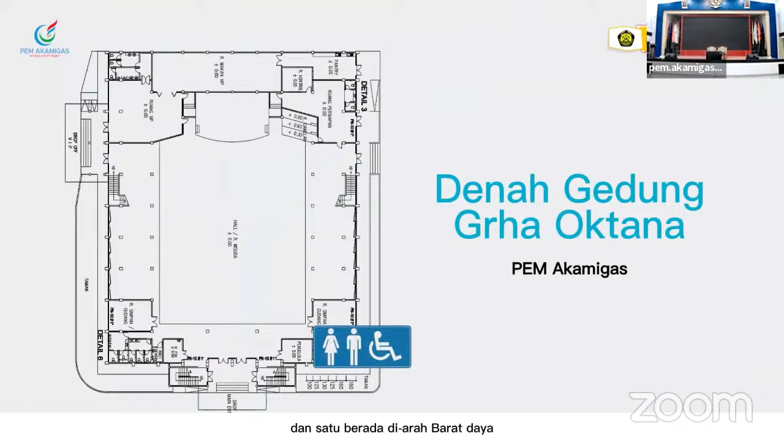Guna menunjang proses evakuasi gawat darurat, gedung ini dilengkapi dengan akses pintu darurat. Lantai 1 terdapat 3 pintu darurat, 1 di sebelah selatan yang merupakan pintu masuk utama, 1 di sebelah barat, dan 1 di sebelah timur. Lantai 2 terdapat 4 akses tangga darurat, 2 di arah selatan, 1 di arah barat, dan 1 di arah timur.

Untuk menanggulangi bahaya kebakaran, gedung ini dilengkapi dengan 9 buah alat pemadam api ringan. Terdapat 6 buah di lantai 1, 3 buah di sayap kanan, dan 3 buah di sayap kiri. Untuk lantai 2, terdapat 3 buah alat pemadam api ringan, 1 di arah selatan, 1 di arah barat, dan 1 di arah timur.

Saat ini tidak ada simulasi kondisi gawat darurat. Sehingga, jika ada alarm berbunyi, itu merupakan kejadian yang sebenarnya. Berjalanlah dengan cepat, tetapi tidak berlari. Jangan panik dan ikuti instruksi dari petugas.

Petugas akan mengarahkan Anda untuk berkumpul di muster point terdekat yang berada di sisi selatan atau sisi barat Gedung Grha Oktana PEM Akamigas. Demikian safety induction Gedung Grha Oktana PEM Akamigas. Kami berharap Anda tetap tenang jika terjadi keadaan darurat. Terima kasih.

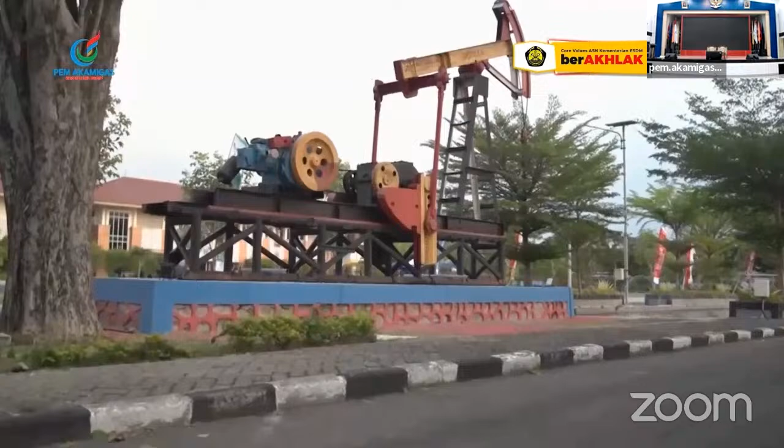Politeknik Energi dan Mineral Akamigas telah berdiri sejak tahun 1966 dengan nama Akademi Minyak dan Gas Bumi atau AMGB. PEM Akamigas merupakan perguruan tinggi di bawah Badan Pengembangan Sumber Daya Manusia, Energi, dan Sumber Daya Mineral, Kementerian Energi dan Sumber Daya Mineral yang bertugas menyelenggarakan pendidikan vokasi, penelitian, dan pengabdian kepada masyarakat di bidang energi dan sumber daya mineral.

Ribuan lulusan PEM Akamigas telah banyak berkiprah di industri migas di berbagai belahan dunia. Keberterimaan industri migas terhadap alumni PEM Akamigas sudah tidak diragukan lagi. Menjadi juara di berbagai kompetisi juga merupakan nilai tambah akan keunggulan mahasiswa PEM Akamigas.

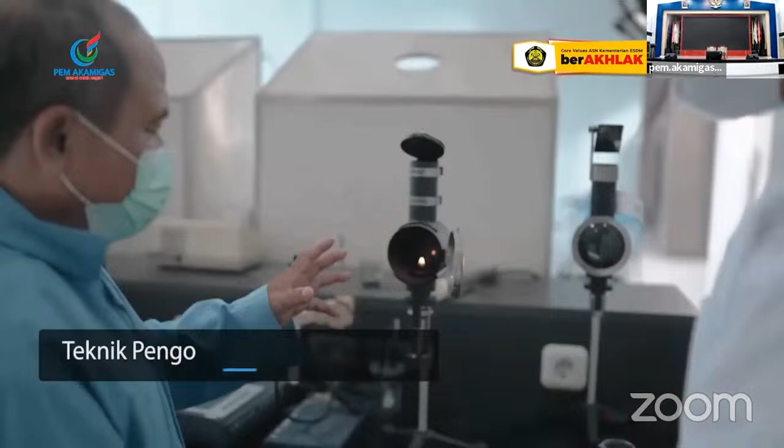teknik pengolahan minyak dan gas, teknik instrumentasi kilang, teknik mesin kilang, dan logistik minyak dan gas.

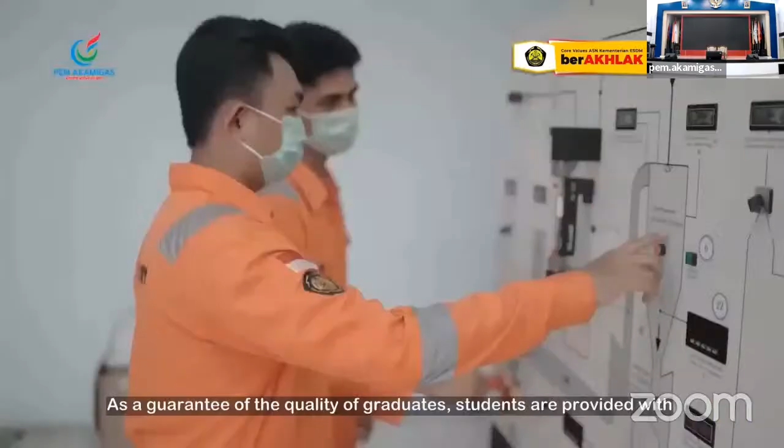Sebagai jaminan atas kualitas lulusan, mahasiswa PEM Akamigas juga dibekali dengan sertifikasi kompetensi K3 Migas untuk seluruh program studi, sertifikasi kompetensi yang sesuai dengan keilmuan masing-masing program studi, dan sertifikat lolos uji kemampuan berbahasa Inggris atau TOEFL, serta pembentukan karakter atau kesamaptaan.

PEM Akamigas hingga saat ini menerapkan sistem pendidikan berasrama. Oleh karena itu, PEM Akamigas telah menyediakan sarana laboratorium dan bengkel yang lengkap, ruang kelas yang memadai, perpustakaan yang sudah dilengkapi dan dikembangkan ke dalam sistem informasi digital library atau perpustakaan online, Graha Oktana, asrama, restoran, sarana kesehatan atau poliklinik, sarana olahraga, sarana ibadah, dan juga sarana rekreasi.

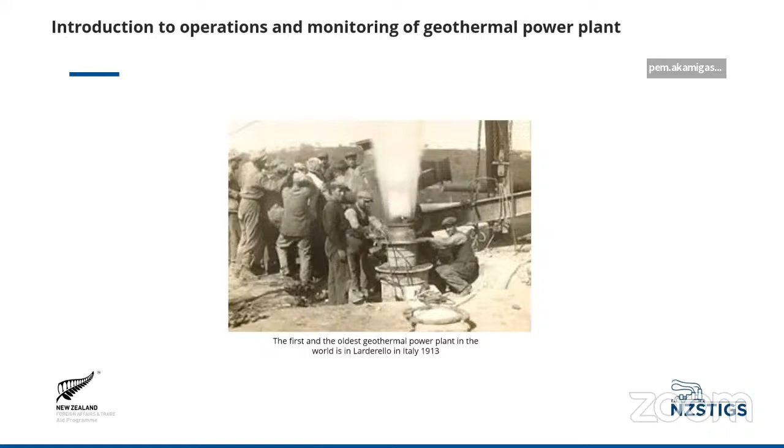There's the very first geothermal generator. There's your first plant, Larderello, Italy, 1913. That's New Zealand's, in 1958. That's what it looks like today.

If you just click on that picture, one in the middle, just click on the one in the middle. Gone a bit too far. Never mind, okay, so let's step back.

So 1958, New Zealand built the first one. And what year did Kamojang get built in Indonesia? 1960? 61? Built by the New Zealand government and a deal with the Indonesian government. So that's when your first geothermal power, still running today, okay.

But what we want to look at is what does currently run. So if we just open up that YouTube clip here.

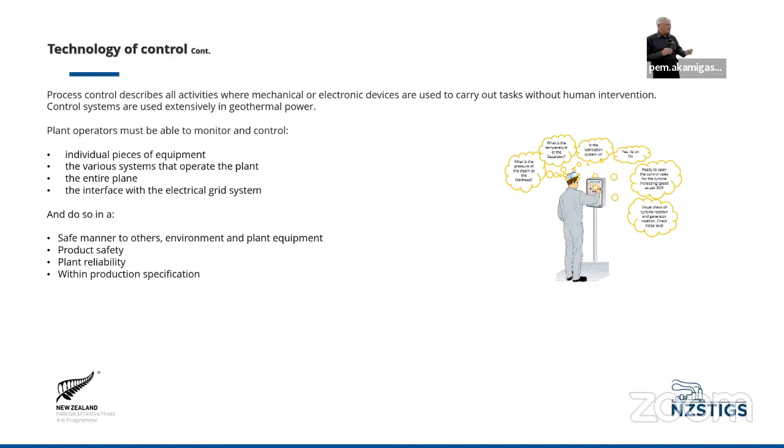You've got to know what the control valve is doing on the steam field. You've got to know what the steam field's doing because it's got traps in it to make sure the steam is still pure. You've got to know what the separator's doing, what the turbine's doing, what the generator's doing, what the power is doing as it gets transferred out to the grid, which is called PLN in Indonesia. And then you've got to understand what the reinjection system's doing. So that's what we're talking about.

Do you need a pointer? Oh, the pointer and... so what do I do here? That just moves the PowerPoint on, does it? The pointer is this one, and if you want to go to the next slide... oh, okay. Thank you, perfect, thank you. Okay.

All right, so here's what we talk about. I know it's hard for you to see. Okay, let's talk about process control. Who's heard of that word, process control? If you're in oil and gas, it's critical. You may not have studied it yet.

Process control enables you to control something from a computer. Typically, that's the pointer... oh, there it is, you're not going to show. That's all right. Typically, you as the operator would do it. Nowadays, we do it a different way.

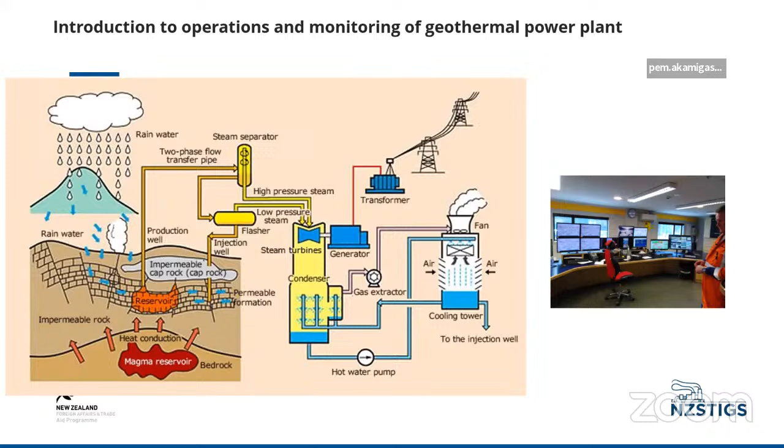Oh, there we are, all right. So, a bit of a complicated slide, but this is how it works. Okay, there's your control room where you sit. There's your plant. All of this is what you in the control room are starting to operate. I liken it to a car.

Who drives a car? Anyone? Who drives a motorbike? Anyone? I know you all do. Okay, last time I was here, a whole lot of people at the end of the day hopped on their motorbikes and drove out to where they live. Okay, so I know you do. Okay, now, my question to you.

Who turns the wheel of the motorbike or the car? Who turns the wheel, or do you go straight into the wall? The driver does, doesn't he? The guy that sits on the front. So who's controlling the motorbike or the car? The operator. Not the driver, the operator, in terms of what we're talking about. And they're the people who you put your trust in to operate. Is that right? And if you have a crash, you just tell the operator you don't want to drive with them ever again. Okay, but you're the operator.

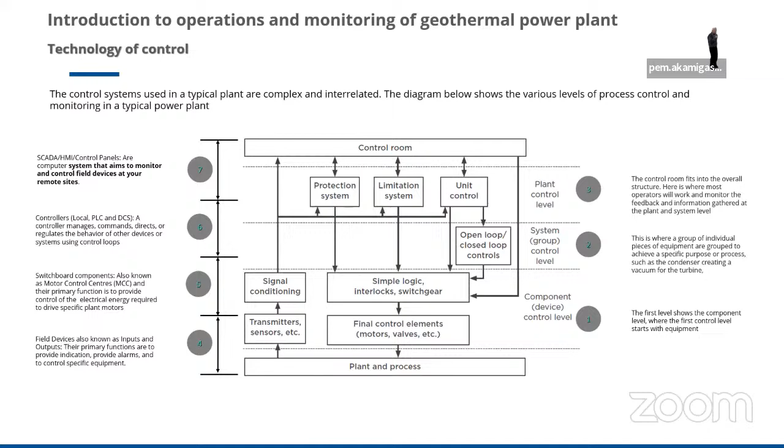And I don't know this will go. That's right, we'll skip that one.

All right, so here's you as the operator here, and you've got to look at a whole lot of stuff that's happening in here. Is that right? And you are approximately 5 kilometers away from here, where your steam field bore is. What do you do? Do you hop in a vehicle and drive all the way down there, check the reading, write it down, hop in the vehicle, drive all the way back and make the change? Or in today's world, do we put a sensor there that tells us what the pressure is, that tells us what the flow is, which comes up on our screen back in the control room, enabling us to control. That's what it's doing in terms of that process there.

Okay, so that's what we're doing here. Here's all the thoughts that we have to do. What is the pressure at the steam, at the wellhead? What is the temperature in the separator? All right, we have to think like that. Is the lubrication system turned on? The lubrication system enables a turbine to rotate. If there's no lubrication on the bearing, a catastrophic failure will occur. What that means is a tremendous explosion on the steam turbine - just like a crash in your car or your motorbike, if that's not working.

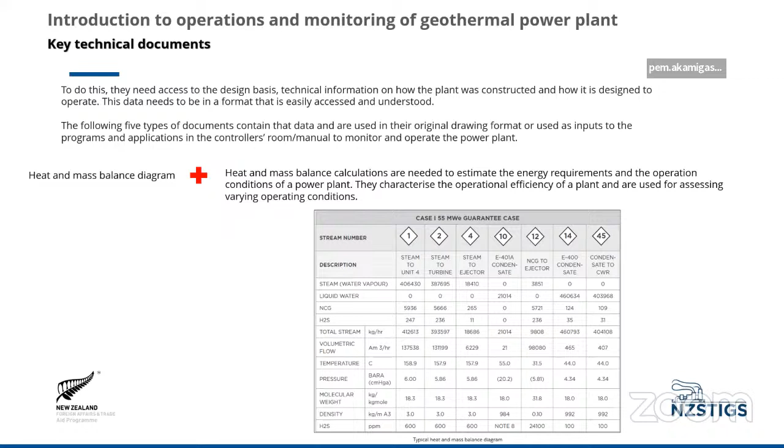So every time you have a piece of equipment in the steam line, you are reducing the pressure. So we need to take that into account.

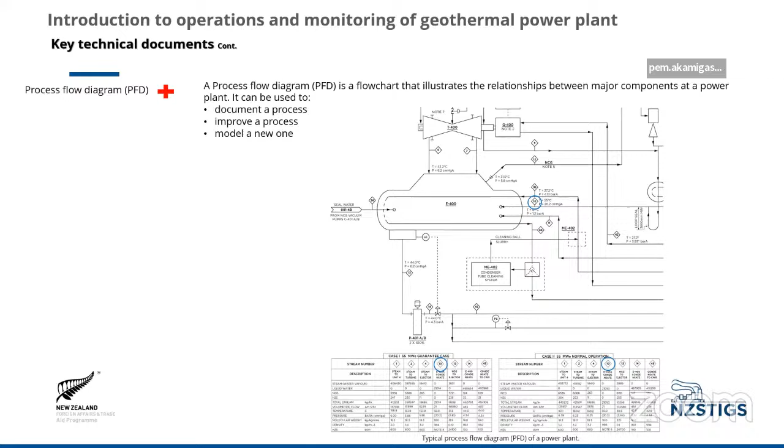Who's ever heard of a process flow diagram? Doesn't matter—that tells you what each major piece of equipment is, and what the flow should be at any given time. And your HMI, human machine interface, or your screen, like your computer screen or your phone, can only give you the data it's given. It gets the data from one of these—there's a sensor that sends data to your application.

Who does instrumentation? I heard a few yells. Where's instrumentation, people? No one here now, you're all gone home. Hey, where's instrumentation? It rules the world. Come on, be excited—nothing works unless instrumentation works. It's all the sensors, we're sensing things, isn't it?

So we have a P&ID, and here's a drawing—here's all your sensors, all measuring. And that measurement goes off to a computer, and it sends back its answers, doesn't it? And you're monitoring it in terms of that.

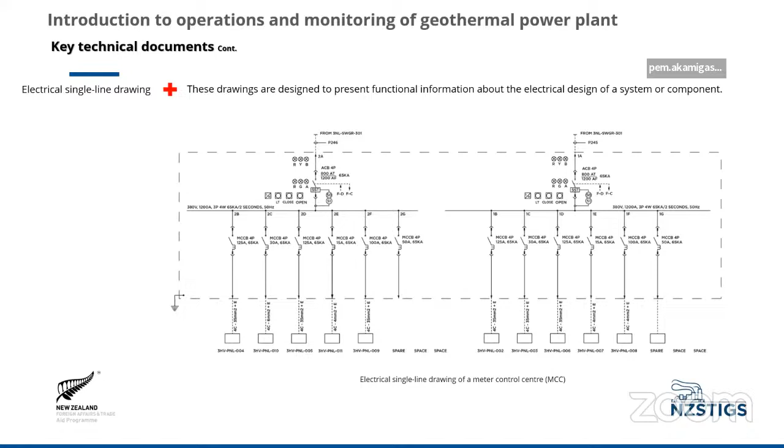Here's my favorite one—who knows all about electrical drawings? Single line drawings of the plant. So for everything that requires energy, and you've got them here—we've all seen people playing with this morning—okay, how that works, and importantly, how you keep the people safe. That's very important in that process. And there are other documents—let's just keep moving.

Okay, who's heard of a block diagram? I think there's some people getting a bit tired here. You know when you stand up the front and cast your eye, you can see people and their expressions, you can see people doing this, or going like that. Okay, you can see everything.

At some point, if you're in a training session with only 10 or 20 people, you can actually stop and say let's take a 5-minute break, everyone walks outside and comes back with fresh air. Just a little thing there. You got to keep thinking, I've got to keep this interactive, keep going, keep doing. How do I do that? I move. Why do I do this? You're going, what the hell's he doing now? Hey, I'll get up, look at what he's doing. Got to keep you active.

All right, block diagram. Here's a question. Do you actually know what that means in terms of operator? This is why it's so important you understand how a block diagram works. Here's a block diagram right here, these 4 chairs. Product in. Product out. Is that right?

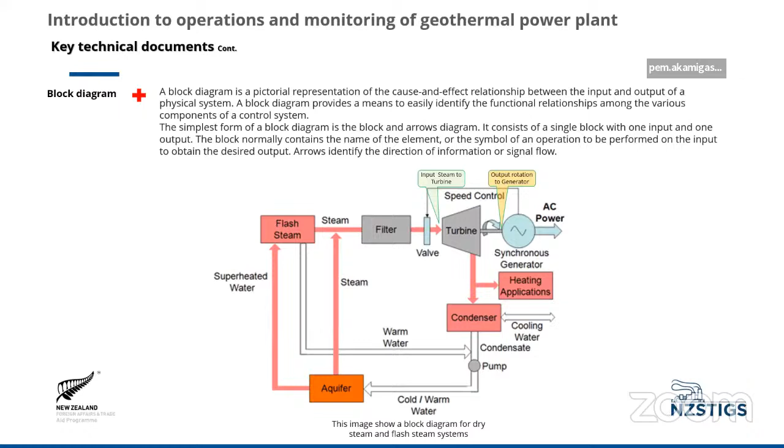Hence why in New Zealand, the operators are paid more than any electrical, mechanical, or instrumentation engineer on site. Paid more. Roughly, if you can calculate in your brain, about 140 to 200,000 New Zealand dollars per year. A lot of money, isn't it? But that's to understand that.

You got a piece of paper? Just a little piece of paper from a book. I'll get my able assistant to hand me something. Yeah, that'll do. Right, beautiful piece of paper, isn't it? Okay, here's what you do with it. She's aghast now - I have made a throwing device. Is that right, made a throwing device? And I'm going to throw it, and I'm going to try and hit that TV. You reckon I can? All right, here we go. Did I?

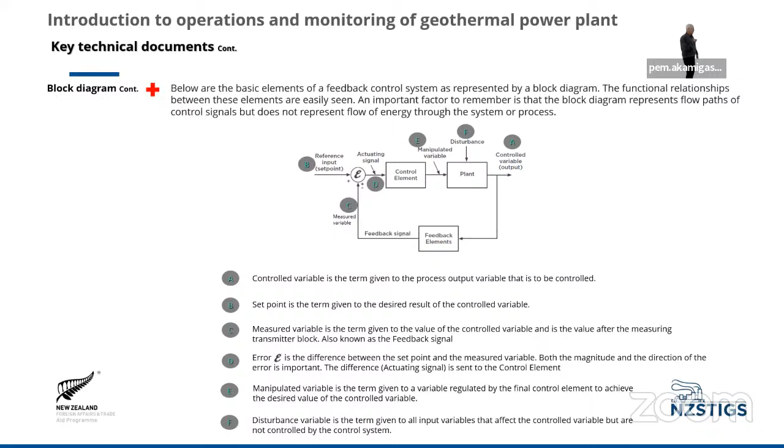For example, when you go home tonight and you're sitting in your dorm and you go, DJ, can someone turn the light out? Or you just say, can you use your open loop switch and turn the light out, please? Because your lights are an open loop circuit, off, on. You've got no control of electricity, have you? PLN has complete control of the electricity. You're just reliant on the transformer to give you power, and you're making the assumption that the power is going to get there when you turn the light on. So that's what we mean by those two types of control.

Right, so what we've got to think about is we want to make sure that we are working and using plant indication, alarm monitoring, and control for specific equipment. And this is what it's looking at.

Local controllers, these things here, are automatic systems. Liken that to your brain when you get up in the morning and you go to the hand basin, turn it on, put the plug in, and sit there and watch it fill up. Is that what you do? As it gets closer and closer to the top, you turn it back, don't you, until it turns off. How many of you have turned it on, put the plug in, and walked out to do something else, come back and the water's flowing over the hand basin? Because it doesn't turn itself off, does it? But that's what you're trying to do.

So what we've got here is a sensor way out here, that's the product. If you had a sensor in your hand basin, you'd be able to get it to come back, measure, and change it. In here is a mathematical equation that works out your set point, what the temperature is reading, or the flow, or the pressure, and sets a change to the controller. And you are, as an operator, monitoring that the whole time. Now you've got to remember, I'm talking one situation. A geothermal power plant will have thousands of these, literally thousands, and you're monitoring and operating the whole lot.

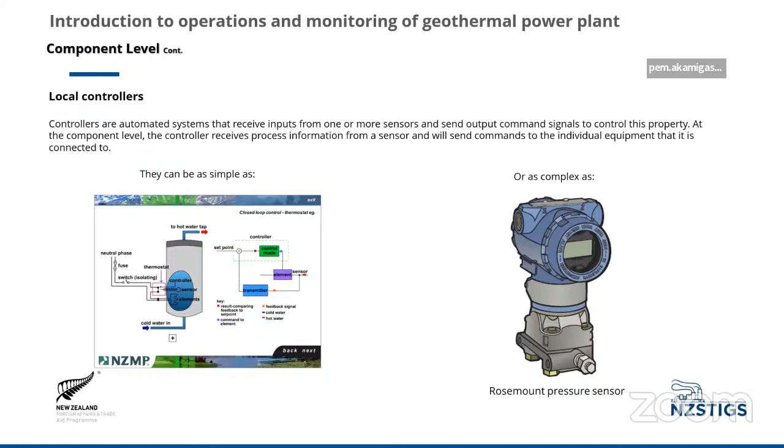It's not just a pressure sensor here, it has a whole computer in there. The computer in there is the same computer that's driving your phone, as in the microprocessor chip. It's the same computer chip that's inside your computer, okay? That's how powerful that instrumentation device can be, in terms of that, and it sends signals away.

Okay, we'll just keep moving, won't worry about the video. So here's what you're doing. Sensors, as we're talking about, are used for indication and monitoring. They're telling us what's happening. So that's your eyes, what else is it? You feel, touch, isn't it? What else? Ear. What else? Taste. Smell. Okay, those are all input signals coming into you that your brain is processing.

I don't know if you guys have been watching Australian news, but they've had a huge explosion in one of their main towns and destroyed a complete building. They had 7 people in it, 1 person died, that's sad in itself. But now the people are saying we could smell gas weeks before it went bang. Now here's a scary thought, the authorities did nothing about it. We can smell gas coming out. Go around with the gas stick. No gas, no gas. Whoops. Bang. Okay.

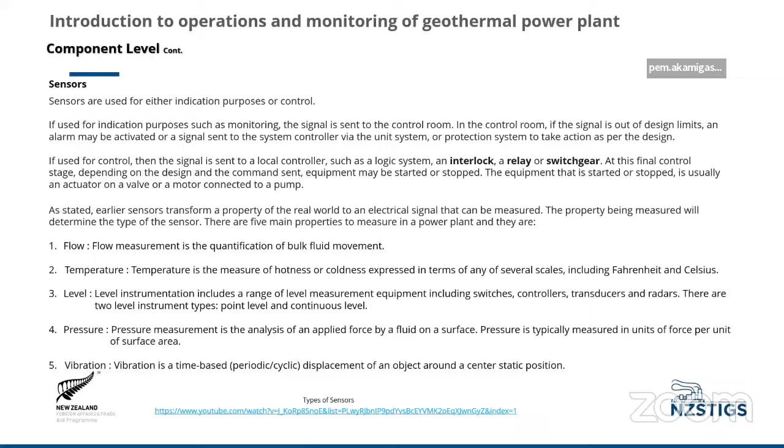Then you've got what we call the final control elements. What are you controlling? It could be a pneumatic valve, a hydraulic valve, a solenoid, electric motors, or large control valves.

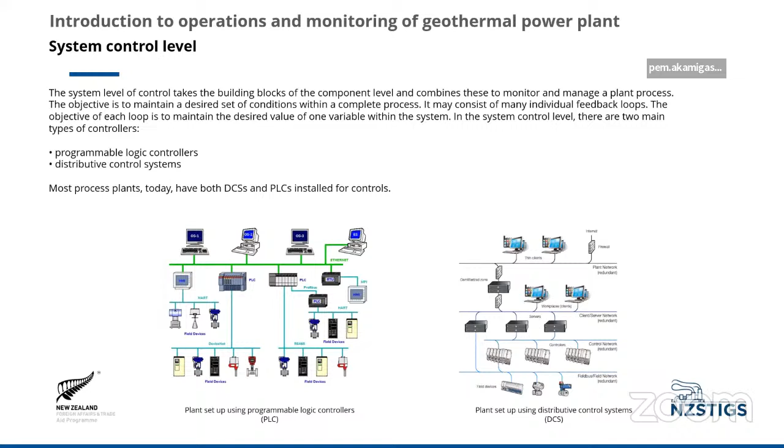Now, do we go back this way? Oh, okay, works the same too. All right.

Now here's a quick one - who here knows how your brain works? Do you know you have a conscious memory? Do you know you have a subconscious memory? You definitely know you have an unconscious memory - that's when you're asleep.

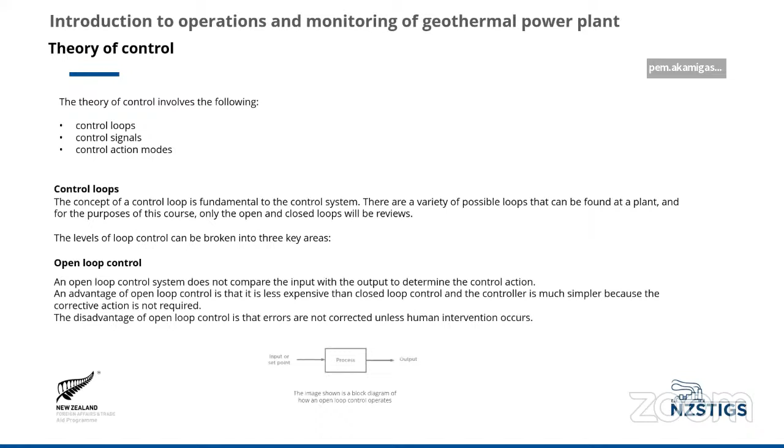We talked briefly about control loops - we talked about open control loops, what it's doing. We've talked a little bit about that basin. What's another common one that you use all day? Who uses a microwave?

That's an open control loop, isn't it? You put it in, you close the door, you press the seconds, and it cooks. If you've got a smart one, you close the door, you press reheat, and it reheats. And you think that's a computer. No, it's not.

It's governed by the amount of power that PLN provides to your circuit. PLN, like every other power company in the world, offers you plus or minus 10% of the voltage. If it drops from 230 to minus 10%, you're only getting around 202, 203 volts, which means, for those of you in electrical, you haven't got as much current because the resistance is the same. Therefore, your heating effect drops, which is why you suddenly go, why is this taking longer than 20 seconds to heat?

Okay, that's what it's all about. So we've got to think like that. And then you've got your control loops, and we talked a little about this. This is your closed loop control.

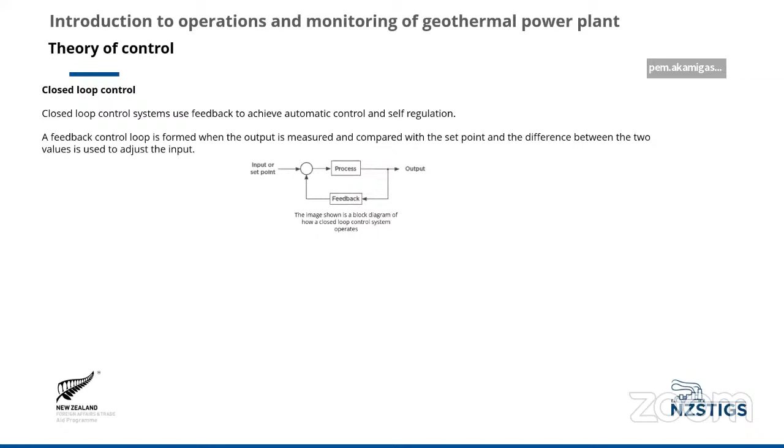Storage water tank. What we're measuring here is level. Common thing that we do inside our control plants, always measuring. Remembering, for those of you into mechanical engineering, what do we know about a centrifugal pump? Most of your pumps are centrifugal pumps in geothermal. It can't suck air, is that right? It must have what we call a head of water inside the actual impeller, because it spins at a very fast speed, doesn't it? Direct drive to a motor, it can spin at 1400 RPM, maybe 2800 RPM, real fast.

In terms of throws it out, which is why we are always measuring the level here to keep a head on that process. So, level control valve, level controller. Here's our level controller, here's our control valve, and here's our transmitter. It's measuring the level by pressure - so it's a pressure transmitter, but we recalibrate to measure level. That makes sure the tank always has sufficient water to enable that pump to pump out. And that's what you need to understand as an operator when you're doing your checks.

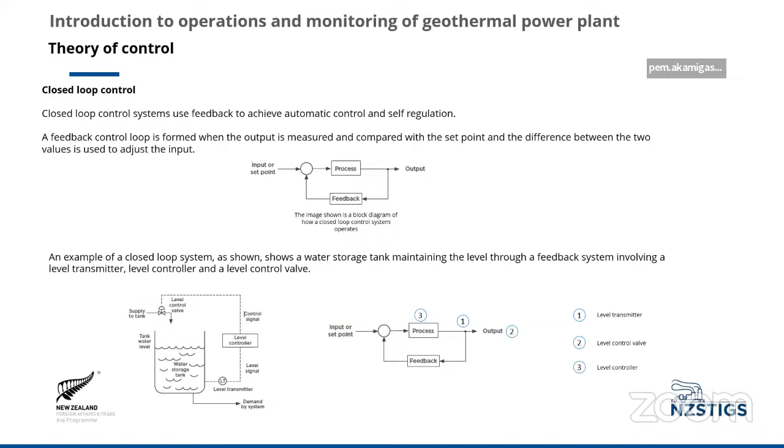Okay, what's the difference? This is where things get really complicated. Open loop is the simplest form of control, and the cheapest, but it doesn't do any of this.

It doesn't continuously adjust. Imagine if you had to continuously adjust the level input to that silo we had just before that balance tank - how often you'd be sitting there adjusting it. And you've got all those other things you've got to control at the same time. So that's why they go for closed loop control.

And the thing we're looking at here is it's never fully open or fully off, depending on the process it's controlling. When it's in the continuous or discontinuous state, it continues monitoring. Here is the key disadvantage - the cost. People often say to me, why don't we have all these things in the sky, cloud computing? It's called cost. The plant to build is probably in the millions of dollars. The fully automated plant in today's standard is also probably in the millions of dollars. There's no difference in terms of that.

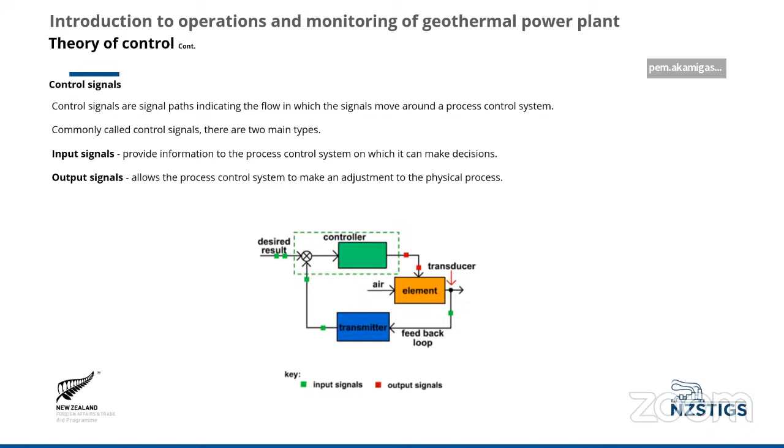We've talked a little bit about input and output signals. Inputs are about providing, outputs are about giving the process the ability to adjust. So when we have control signals, we can have on-off control, which is what that water heater was doing. Remember the water heater and the electrical in your house? It's a controlling device turning on-off.

If we wanted an accurate temperature, say you wanted it at 72 degrees for a shower - you probably don't, but if you did, then you'd have around another $8,000 to put a proper controller on it that enables you to monitor it that closely. We don't need that, so we just do it that way.

However, if we want continuous control, then we've got to think about this. What are we trying to actually think about? We've got those continuous signals in terms of that. So we've got to be careful.

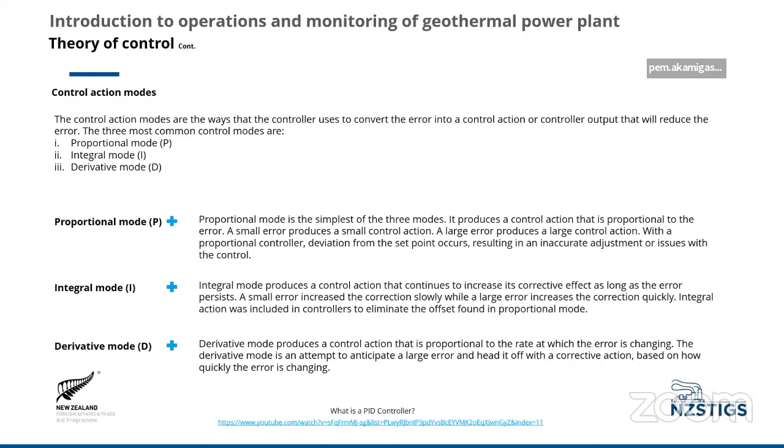What we do need to know, although this is a very technical topic in itself, and more than happy for you to check that out when this is posted, because I'll be leaving it here and you can read it - proportional integral derivative, that's the key fundamental modes of control action.

Proportional - do you know what the word proportional means? Those of you in instrumentation should be listening now. This is fundamentally your bread and butter, isn't it? How do you adjust a response within your feed? By adjusting the proportional, the integral, and the derivative.

So, what's proportional? If you're going 100 miles an hour and someone walks out in front of you, and you hit the brakes so as to not hit the person that walked out in front of you - there's 100 meters between you and them, and you're doing 100 miles an hour. You're going to jump on your brakes. What's going to happen?

You jump on your brakes. Your car is going to do what? Apart from squeal from the tires locking up, is that right? And you're going to skid, aren't you?

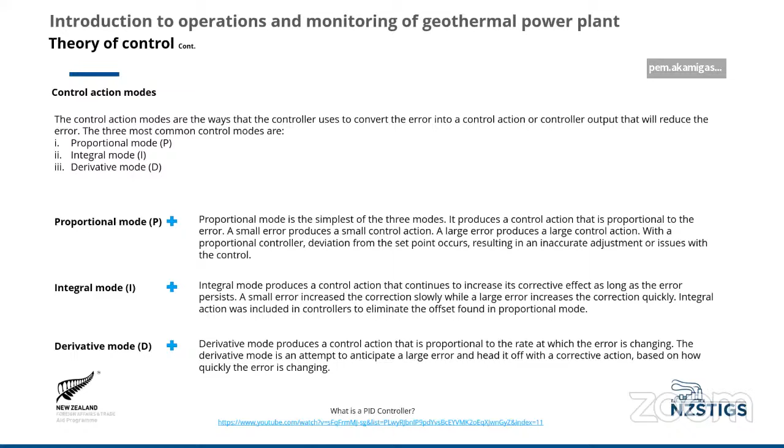It's just evolution of time, it's just like your phone. Remembering years and years ago, my mum, who lived till she was 97, had a phone when she was only 3 years old. And it did exactly what the phone was supposed to do. Hello, how are you? Nice to see you.

There's no such thing as computers. When she was 3 years old, she rode a horse to school each day. It was a scary thought, eh? In New Zealand, it was very scary to think that someone rode a horse to school each day. So outside the school was the old western rail, and she tied it up, okay. And then eventually we are where we are today.

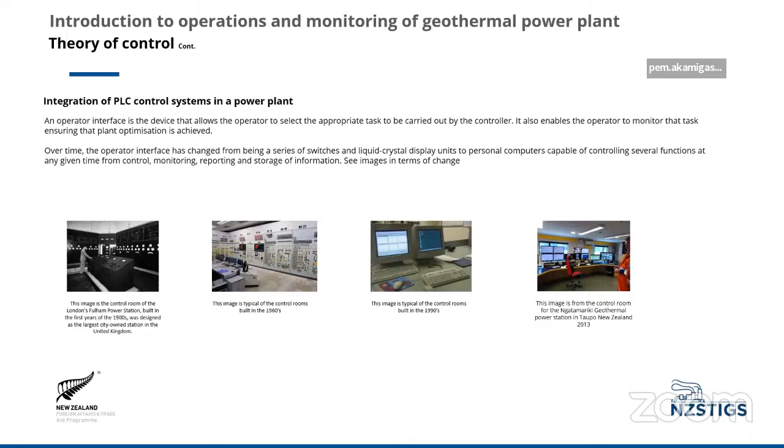Okay? I'm an old-fashioned time, when my children want to get hold of me, I ring them and talk to them. Why don't you just give us a WhatsApp? No, I want to talk to you. You know what my answer really is? I love you so much, I want to talk to you. And then they go, oh Dad, you sound sick.

All right, here's the control room. Much as you think all these screens here are for the operator to play on Facebook and do all that, they're not. His screen is his phone, which he hasn't got in his hand. Those are the screens controlling the plant. That's the screen that the site management, which is based in Hamilton, and this plant's based in Taupo, can read data. That's the alarms of people who walk on the site, and where we monitor key things, so key pressures, key temperatures that you can read, and that's a spreadsheet of the faults that are coming up, how many faults are there, and what should I do about it? Is that fault important in terms of that process? So you're working the whole time in that, okay?

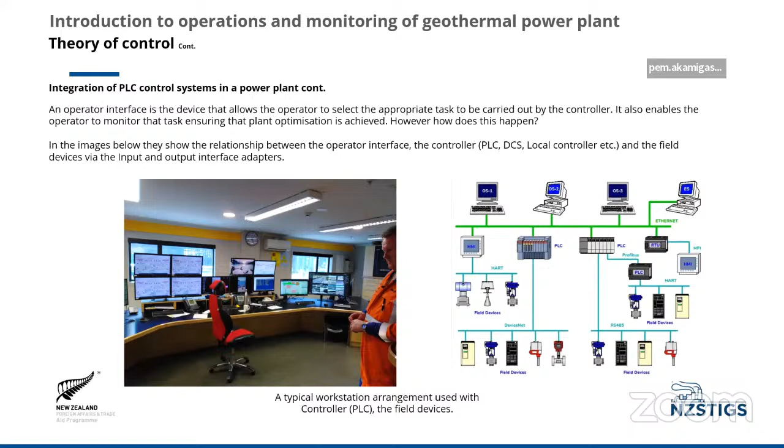If I'm in the maintenance team, I might be doing some configuration, looking at fault diagnostics, and looking at maintenance schedules. If I'm in the engineering function, I'm looking at the engineering, logging actions, archiving, checking the alarm systems, and data logging as appropriate. I also go back on historical data to see if it's trending a common fault. That's what I'm doing - operations, you're here.

Maintenance management are in here, and here you're talking with the engineers. No one is more important than the other in terms of that process.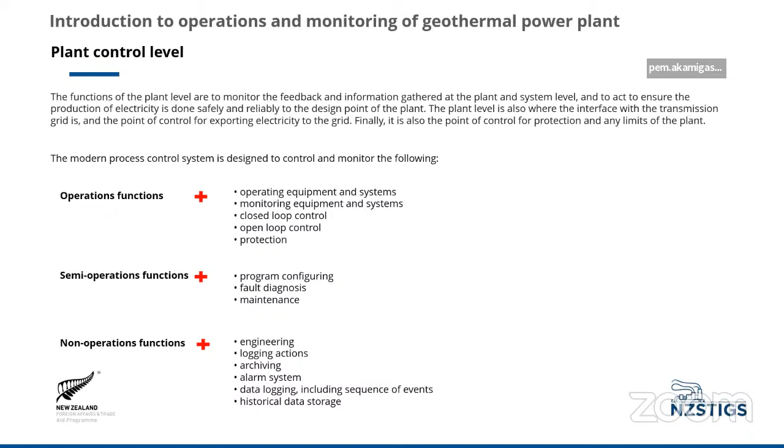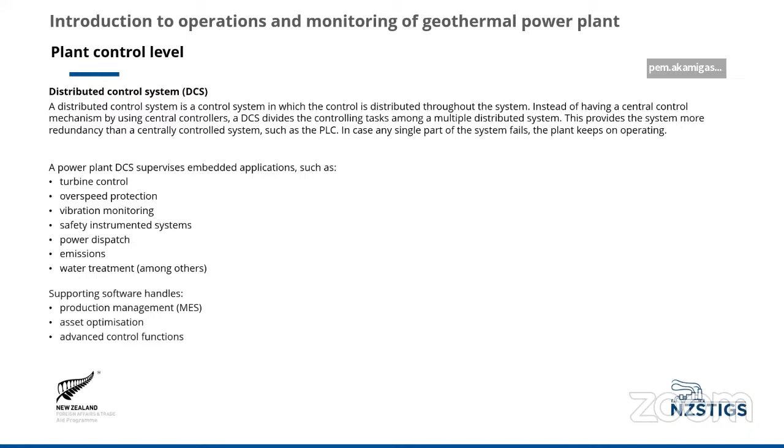We've covered that, so we'll skip that. We've talked about what a DCS does, everything else does, so we'll skip that.

Now the alarms - these are operations' worst nightmare, because you've got to do something when they ring, when they go off.

When someone says to you, we're having a practice fire drill today, how important do you take notice of the siren when it goes off? Or do you go, oh yeah, another fire drill, we've got to walk out the building and go to the part where we're supposed to meet? So you'll walk out, get your roll taken, then turn around, come back in, and that's a fire drill. Exciting, eh?

Who's actually pressed the fire button to say they're watching a fire? I have. Believe me, in an industrial environment, when you see an electrical explosion blow out of a main switch and you press that button and no one expects it to happen, the whole staff on that site change their attitude to an alarm, because they know it's not a practice. You don't see them walking slowly out, you see them going to their designated posts very quickly.

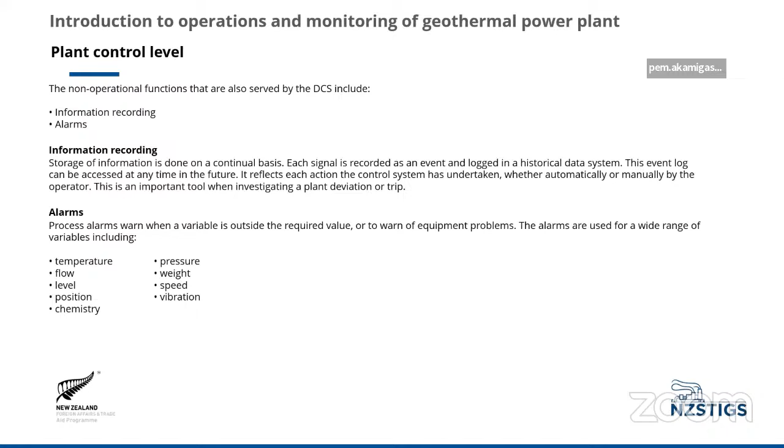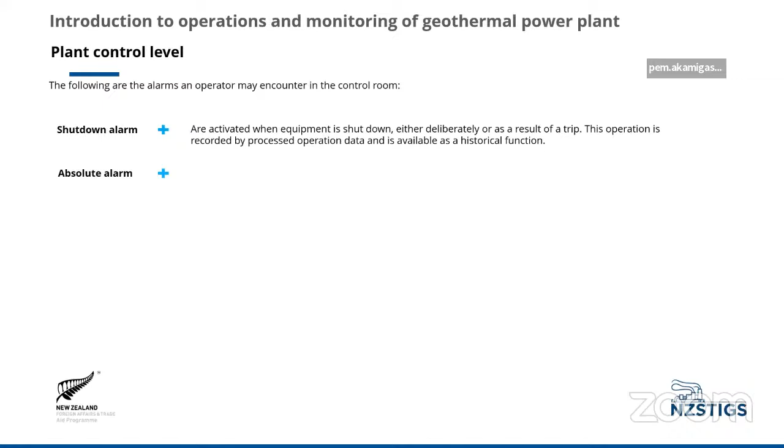These are different alarms that as operations you come to learn that you have to abide by. There's a shutdown alarm - so if you've got a piece of equipment that has shut down deliberately or as a result of a trip, it's going to alarm, and you have to take notice, because somewhere along the line you may have to do something.

Deviation - so sometimes you have a deviation alarm coming up. This thing's coming up to a very high level, we need to say, well actually you've got a problem. It's growing, it's growing, it's growing - bang, it's hit you. And if you haven't done something back here, you could have prevented that.

Memory alarm - that's a memory alarm where it's saying actually your set point's been passed, we're going to stop you. Remembering, the plant will stop you from doing things. It has to, in the interest of environmental health and safety to people, and damage to the plant.

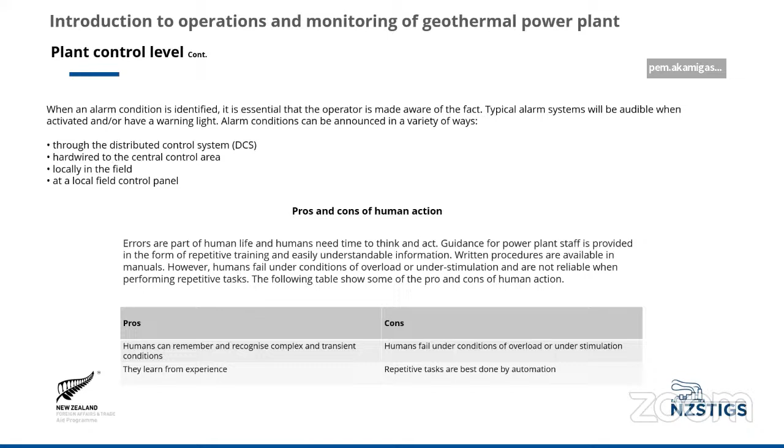And some of you are feeling that way now - you're understimulated, you're not listening, you're away, and that's alright, we understand this. So we keep moving. We need to think about what else we can do - we'll just skip that one.

Okay, here's a few other things that we need to watch: chemicals, purity of steam, pH levels, levels of biocide, and two-phase flow.

Now, who's ever heard of a system? If you're inside your car, are you sitting inside a system? You are, aren't you? What you want is your car to take you from A to B. And if you're young and enthusiastic, you want it to do that as quickly and as safely as possible. So you hop in your car, turn the key on, start the engine or your motorbike, and let go. As quickly as possible, that's what we're looking for.

So your geothermal plant has a whole lot of systems. One of the systems I think we should allude to is the main generator. All these are systems, things that the geothermal plant has to do and has to have for it to work. Let's look at the main generator.

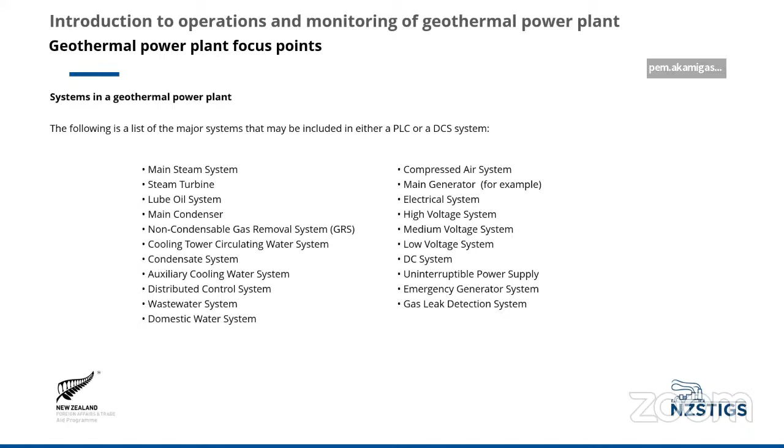Now, who thought the main generator had all this controlling it? Interesting, isn't it? Just to get the main generator to work, over and above putting the mechanical energy in it. You imagine how much instrumentation's on that.

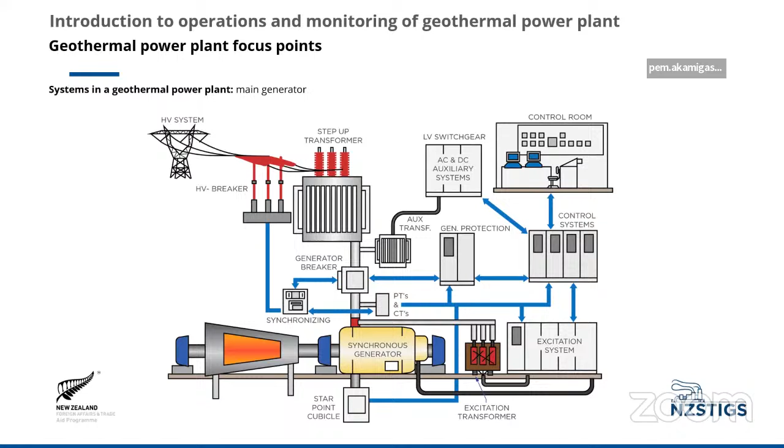Okay, so it is quite a complex little process in terms of that. Sorry Chris, you have 10 minutes left. Yep.

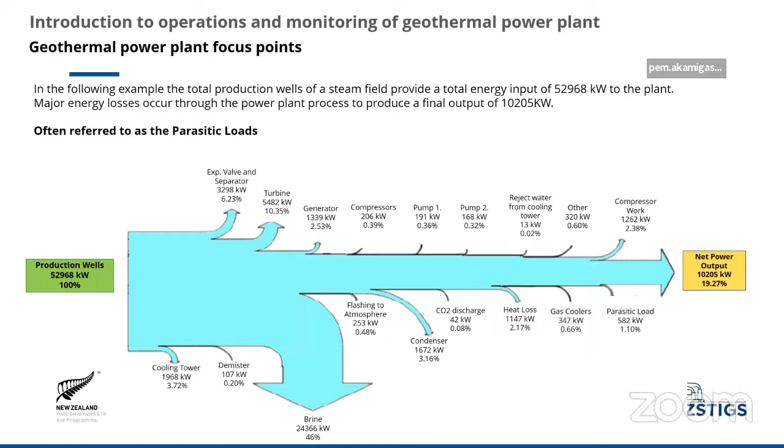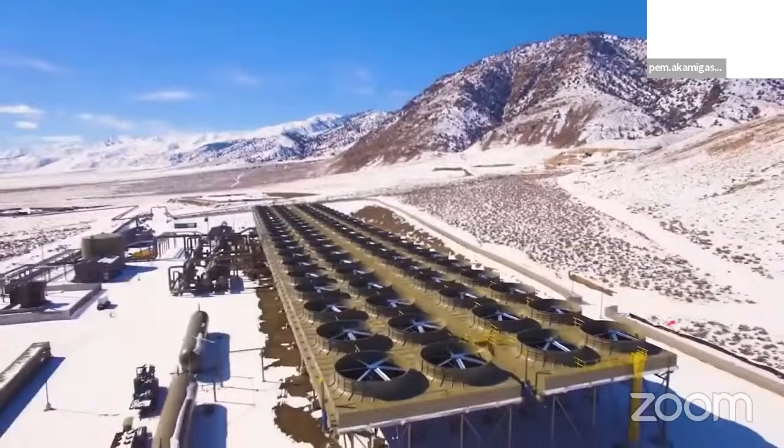Okay, thank you for that.